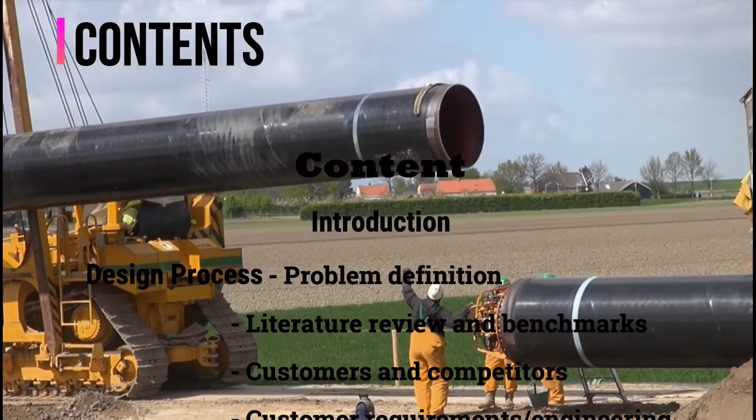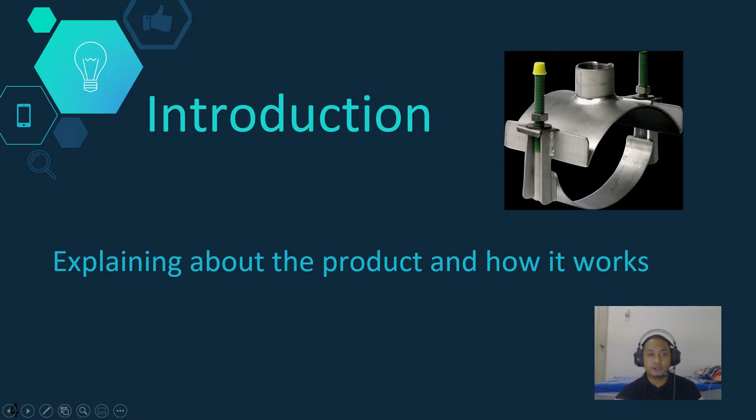Convenient pipe clamp. Objective of this project is to analyze the problems people are having using existing products and to prevent previous problems from happening again when using the product.

Next, to design a pipe clamp that can act as a vessel support system to hold sensors securely in place. Finally, to develop a pipe clamp that has high flexibility for use with all kinds of sensors.

Assalamualaikum and hi, thank you Aidil for the introduction. I will continue with design processes. First topic is problem definition.

I will give you 3 examples that we will face if our pipelines have not been inspected carefully. First example is general deterioration - it is when the state of the pipe has deteriorated and become rusty. Next is destructiveness - it is when the pipe gives more damage to the material that flows in the pipe.

For the third example is poor effectiveness. It is when the function or the work efficiency of the pipe becomes reduced or decreased.

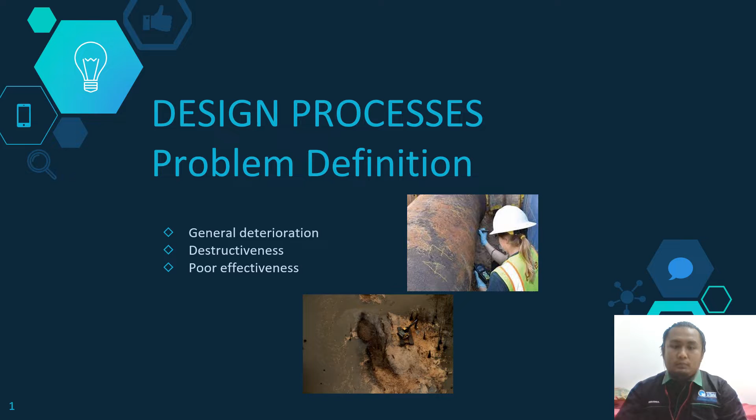Impacts on society and environment. For society, people or workers may be injured if the pipe is broken or not safe to use. Extra cost will be charged to repair or buy a new pipe.

For environment, environmental pollution may happen because the broken pipe is difficult to fully decompose. Next, it will affect the future because the resource is limited and non-reusable.

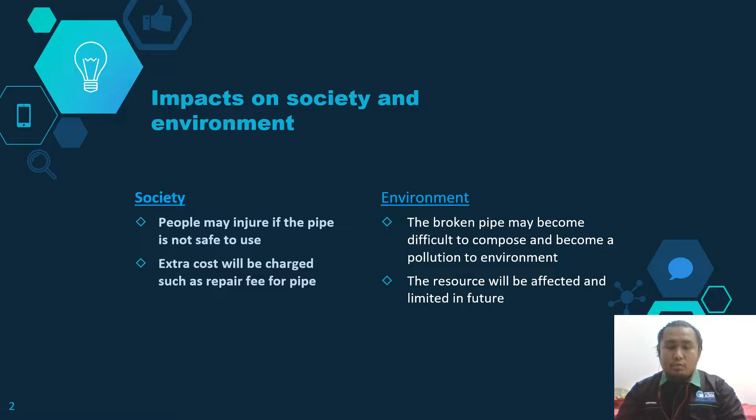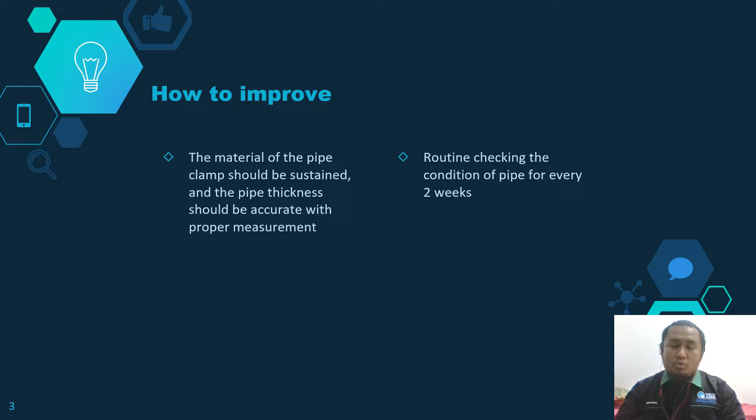How to improve? First, the material of the pipe clamp should be sustainable and the pipe thickness should be accurate with proper measurement. Next, routine checking of the condition of the pipe every 2 weeks. These are 2 steps we can use to face the problem.

Business opportunity. First is oil and gas industry - a pipe used to transport oil from the production area to the export loading terminal. Next is welding industry - it was made to connect several sections of pipe.

Third industry is sewerage industry. A pipe used to transport wastewater or sewage from homes or industries.

Here, oil industry doing the pipeline process that needs the inspection process, so they need a clamp that can increase the inspection process. So we must create the best clamp that all the industries want.

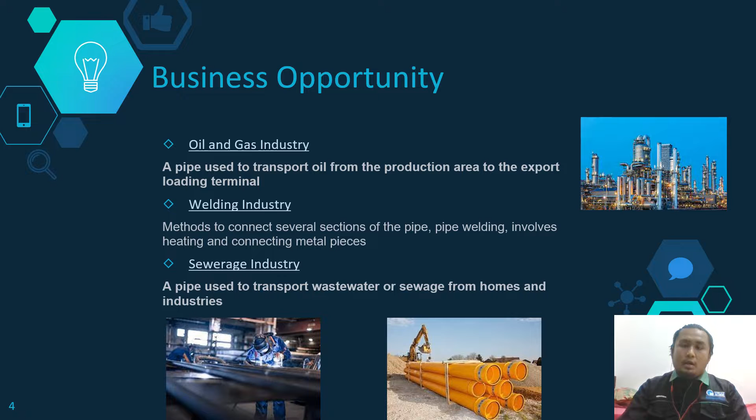The last topic from me is benchmarks. First is adjustable - the importance of an adjustable pipe clamp. We need to create a clamp that can be used for various diameters of pipe.

Next is motorized. We need to create a stable motorized pipe clamp. It can help to get accurate results because we can avoid human error.

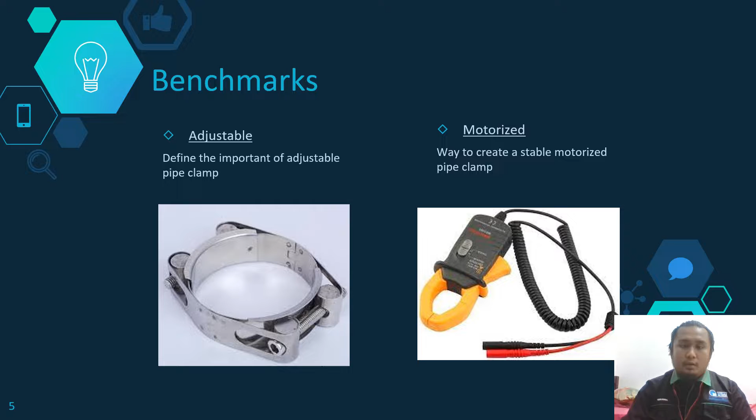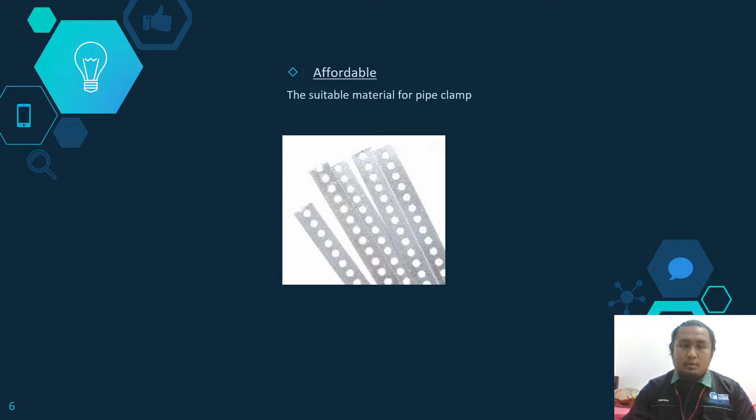Lastly is affordable. This picture shows metal strip - it is a suitable material for a pipe clamp, and more importantly, it is affordable. So that's all from me, thank you.

Assalamualaikum and salam sejahtera, thank you Hisham for the previous presentation. So now we will proceed to customer and competitors.

The first one is the company has set up customer gratification as our first priority. Basically, the product that our company has created is really close to customers' requirements. So the product is very easy to use, and mostly the target user for our company to sell to is engineers, because engineers have the capability of conducting or using our product in order to put it on the pipeline.

So the next one is for competitors. The company has set up a slogan which is 'Hustle is temporary and greatness lasts forever.' In this section, the company has underlined several ways in order to challenge other competitors, which there are three.

The first one is leadership, the second one is focus, and the last one is open-minded. These are the three basic things that our company uses in order to overcome the other competitors to sell our product efficiently.

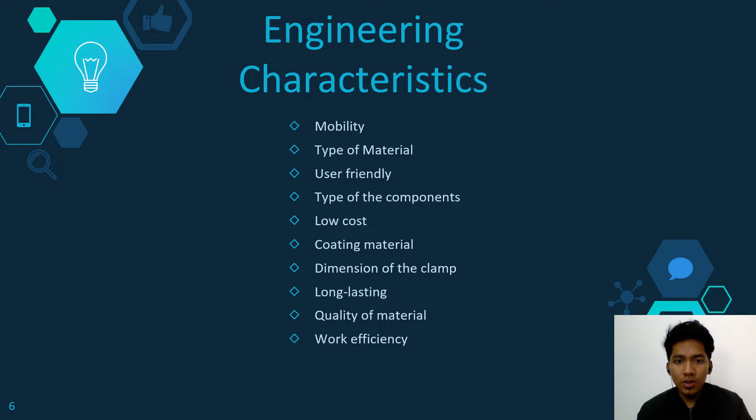In completing this project successfully, the company has come up with relevant standards to settle this product. The product we are using has its own personal values, belief, and performance. There are no worries for the customer if the product has any defect, because the product is completely perfect. It has its own characteristics which other competitors may not have. The very crucial part is this product is trusted, because the system, management system, terminology, and safety are all in the greatest conditions. That's all from me, thank you.

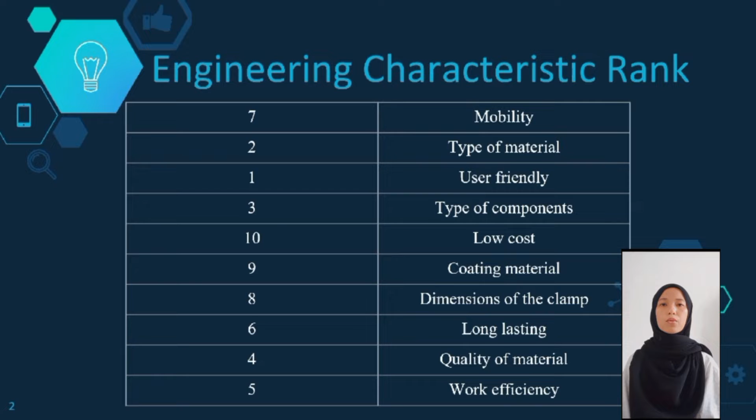Next, the product design specification. Firstly, the engineering characteristic rank. From the table, we can see the first rank is user-friendly and the last rank is low cost.

Secondly is the project identification. From this part, we will know the main function of the clamp. Our clamp will act as a vessel support system to hold the transducer secure in place. Furthermore, the clamp will be easy to assemble and disassemble. The important thing is this clamp is suitable for various sizes of pipe.

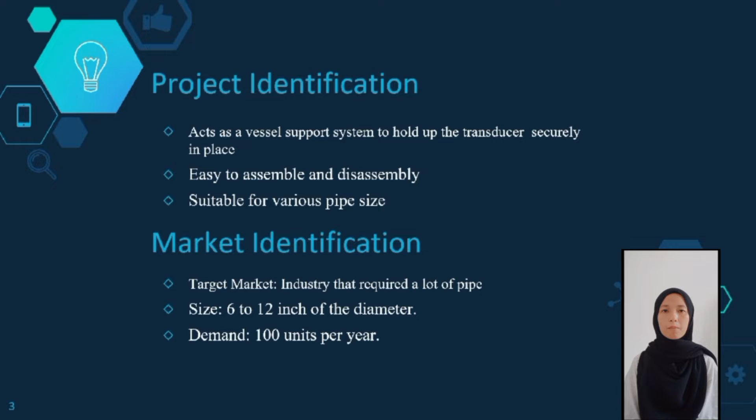Then the market identification. The target for our project is industry manufacturing pipe. For the size, it will be between 6 to 12 inch diameter clamp. We expect the demand for this clamp to be 100 units per year.

Next is the physical description. This clamp requires highly sustainable material and needs to be coated. In addition, the constraint is a 1 kg upper limit for acceptable weight.

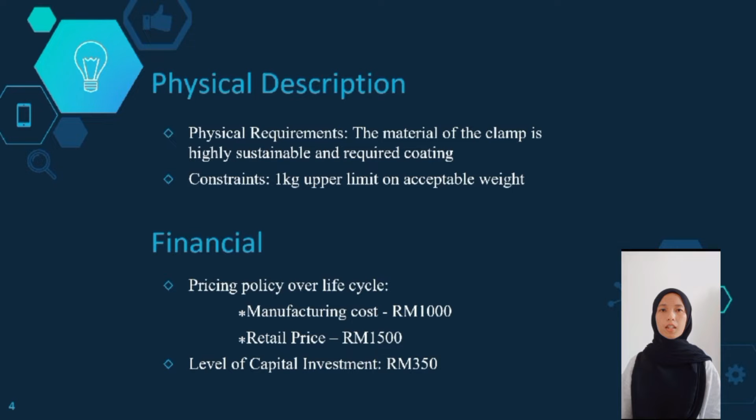Moreover, the pricing policy over the life cycle: the manufacturing cost is 1,000 ringgit and the retail price is 1,500 ringgit. The level of capital investment is 350 ringgit.

Lastly, the life cycle target for this clamp. We target the cost of installation and operation to be 2,500 ringgit, and warranty is up to 3 years. Also, the reliability of the clamp: the material is durable and easy to obtain.

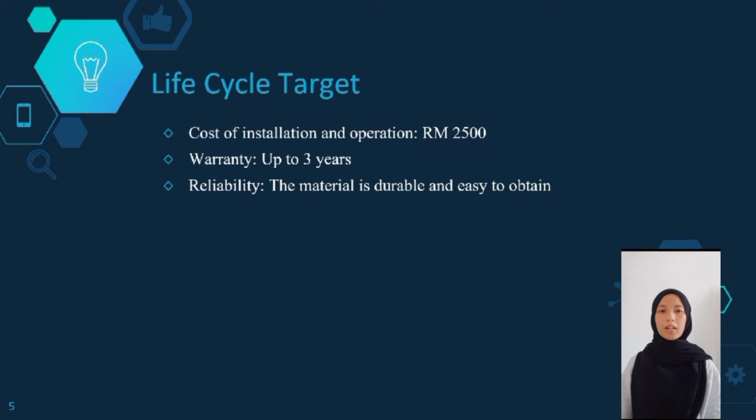So, what is project management? Project management is the process of leading the work of a team to achieve all project goals within the constraints. This information is usually described in project documentation created at the beginning of the development process.

Next, here is the Gantt chart of our proposal. It consists of a total of 5 tasks and we need to complete it within 15 weeks. Each of the tasks consists of different subtasks. For example, in task 1, product planning, it consists of 2 subtasks: group formation and problem definition for the first week, and HOQ and design specification PDS for the second week. We have to complete the subtasks within the time given.

I also labeled the tasks with coloring. For example, in task 1, I labeled it with yellow color. For task 2, I labeled it with orange color. With the coloring, we can have an easier understanding of this Gantt chart.

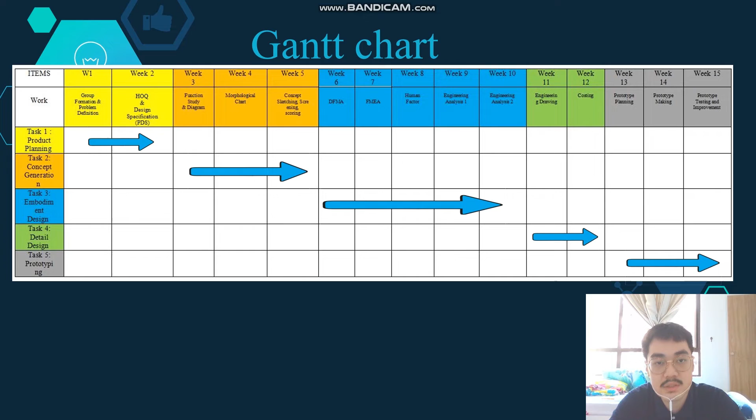Here is the responsibility matrix. Since our group consists of 5 members, each of us will take care of a part. The introduction and conclusion is handled by Aidil. The design process is handled by Hisham and Faris. The product design specification is handled by Hajar, and project management is handled by me.

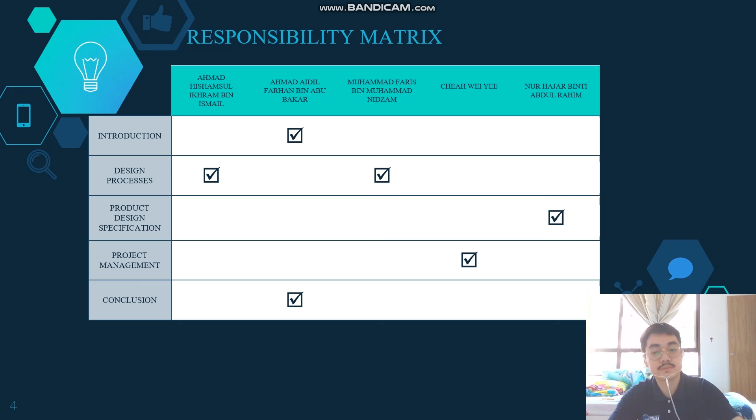For the last part in this presentation is the conclusion. We need to determine the process needed for the product before proceeding to manufacture. The first process is we need to determine the market analysis for the product. We had observed the general need for the product, benchmarked the performance criteria, and listed competitive current products including the business opportunity for our product.

In addition, we had determined design parameters which contain customer requirements, product design specification, and engineering characteristics for our product. We came up with quality function deployment for engineering characteristics. All the processes above are important to determine the extent to which the organization and competitors are able to fulfill customer requirements.